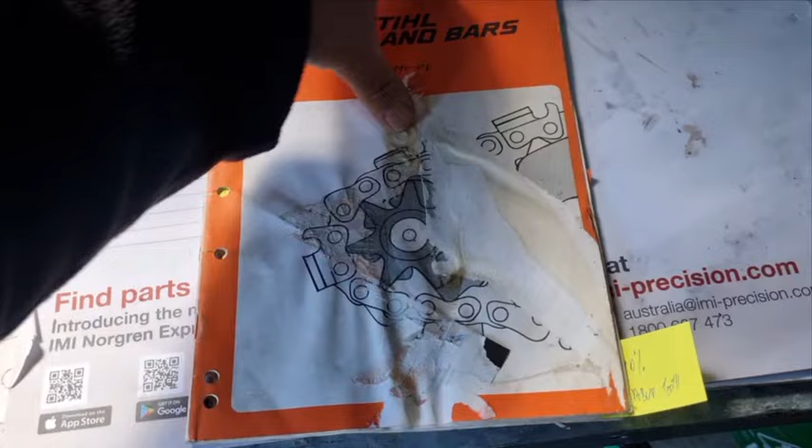The only thing I can see is the actual tooth geometry looks slightly different in the pictures. It doesn't go into huge detail, so we'll just go over a few points I've got marked. But if you look at the shape of the tooth, it looks like the Cox chipper chain.

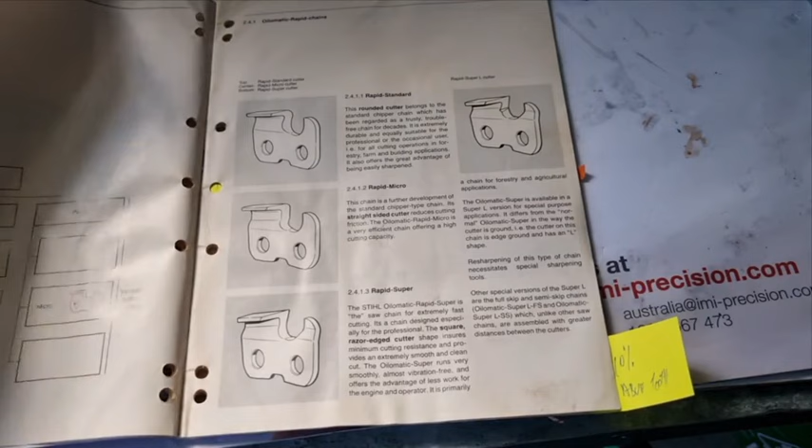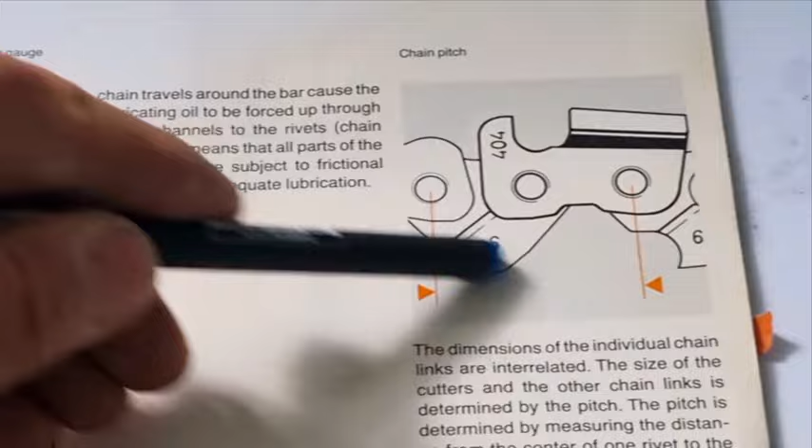Now I've got something marked on this page. Yeah, look, if you have a look at that, we'll see if we can zoom in there. It really does look like the Cox chipper chain. So the profile looks a little bit different than it used to on the tooth. This is going back 34 years ago.

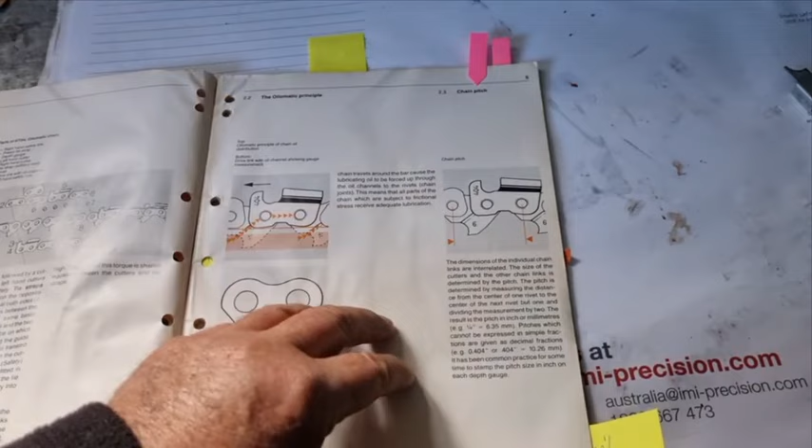And we'll just go up to the next one I got marked. This one here, so what do we got here? I've got something marked here. Yeah, look, this is something that was interesting that I found out.

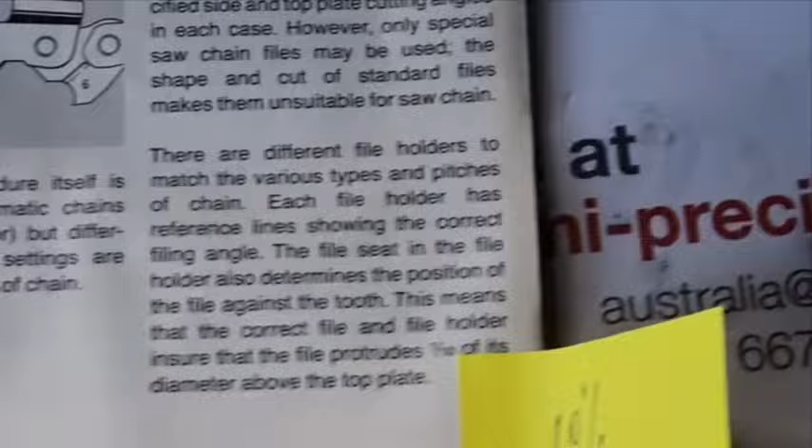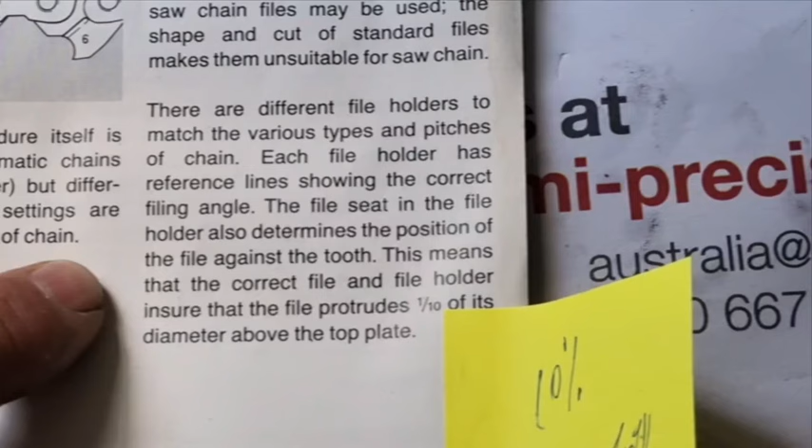So this is from Stihl, and they're saying, I'll see whether you can read this, there are different file holders to match the various types and pitches of chain. Each file holder has a reference line showing the correct filing angle. The file seat in the file holder also determines the position of the file against the tooth. This means that the correct file and holder ensure that the file protrudes one tenth of the diameter above the plate.

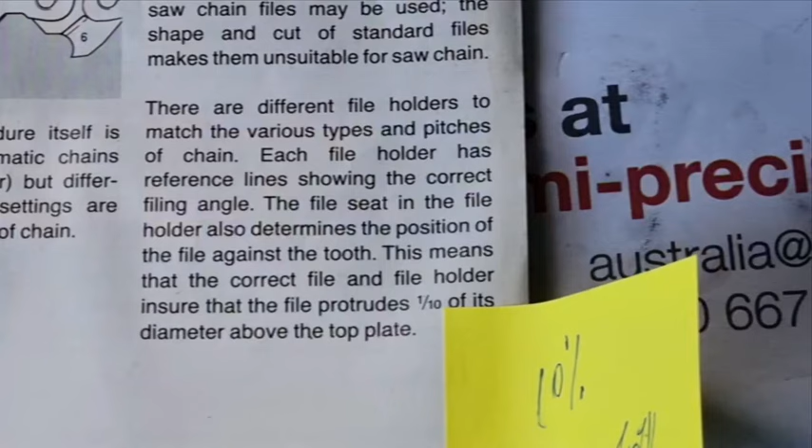So they're saying that when you use, and I've got one here, the old file holder, which is this type of thing here, that the file only protrudes 10% above. Like I always thought it was around 20%. Maybe it is now, but back then it was definitely 10%. And that's written here in the Stihl booklet. So that's something that was interesting.

Now another thing that caught my attention, there's a few things, is when we go here, we'll see if we can zoom in there too. We'll just sort of get this in the right spot here. I want to draw your attention to the different file diameters.

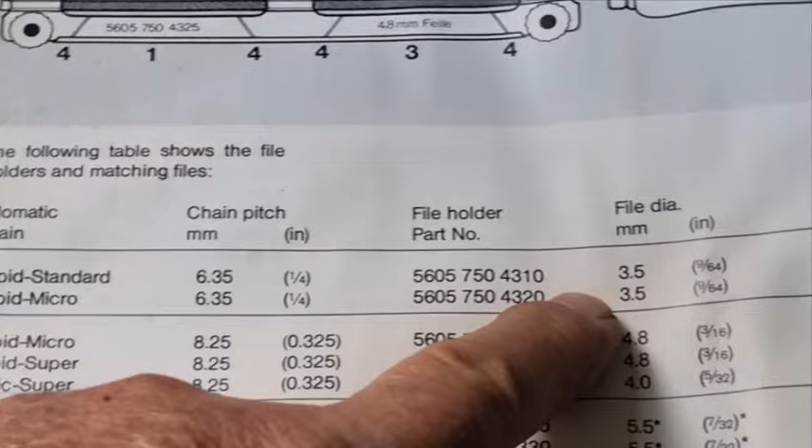We start off at 3.5. And even if we went up to a 1/2 inch chain, they list a 1/2 inch using 6.3. But you'll notice you've got a 3.5 millimeter file for a 6.35 chain or 1/4 inch. 0.325 is 4.8 millimeter file, and also they list a 4 millimeter file there as well for 0.325.

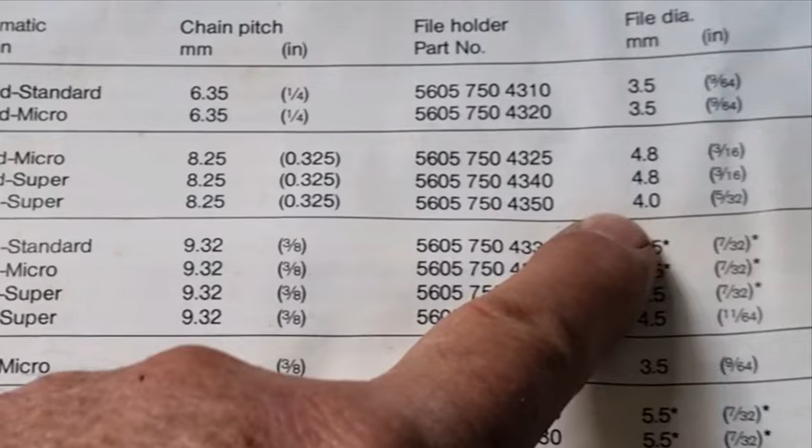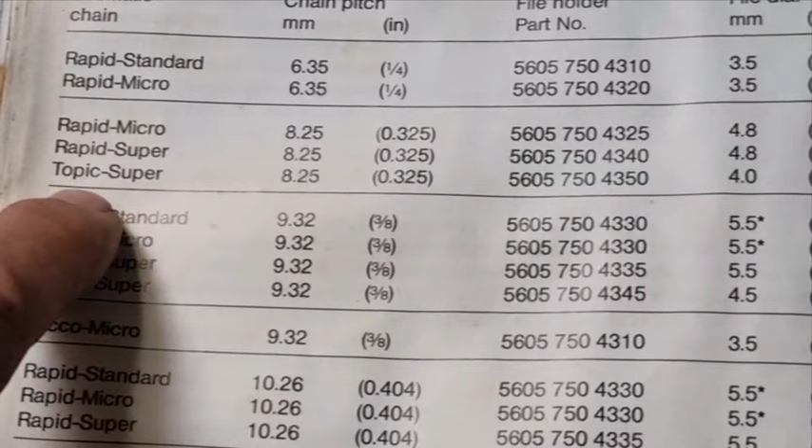So I'm not too sure. Oh, there you go, there it is. So here's another one, let's see whether you can see this, called Topic Super. I've heard of Rapid Micro, Rapid Super, but not Topic Super. Whatever Topic Super is, 4 millimeter file.

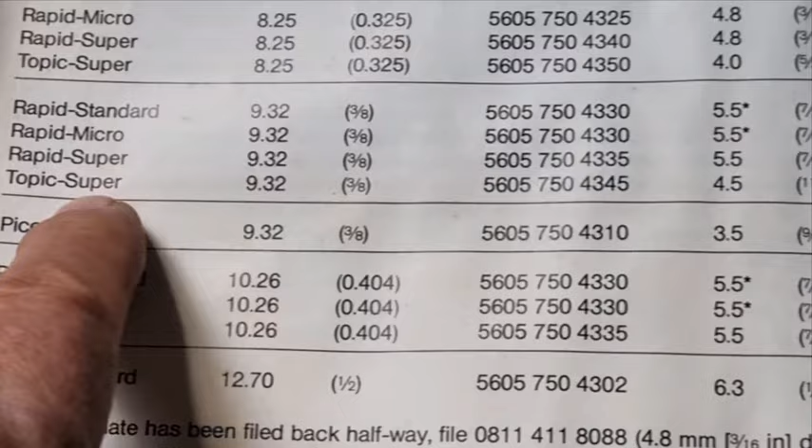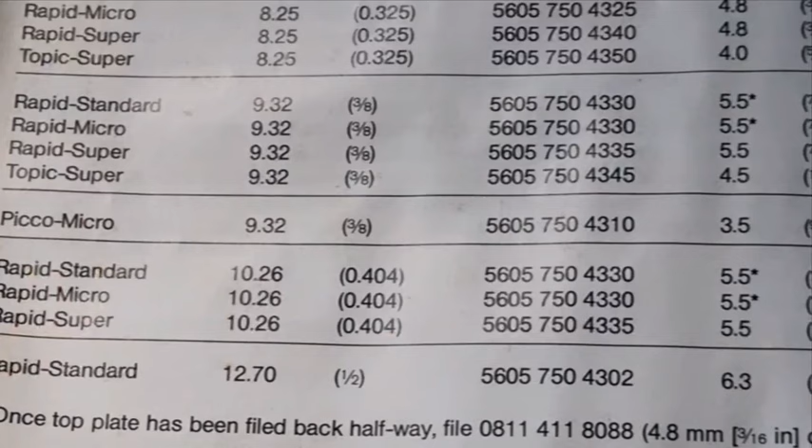And then if we go to Rapid Standard, which is what we use, Rapid Micro, Rapid Super, Topic Super -- as I said, Topic Super, I'm thinking this must be low profile or something -- but you see how you've got 5.5 millimeter files? There's no reference to a 5.2 millimeter file, which is what they use these days. I'm sort of thinking the teeth were slightly different profile back in those days. Yeah, no 5.2 millimeter file there, so that was interesting.

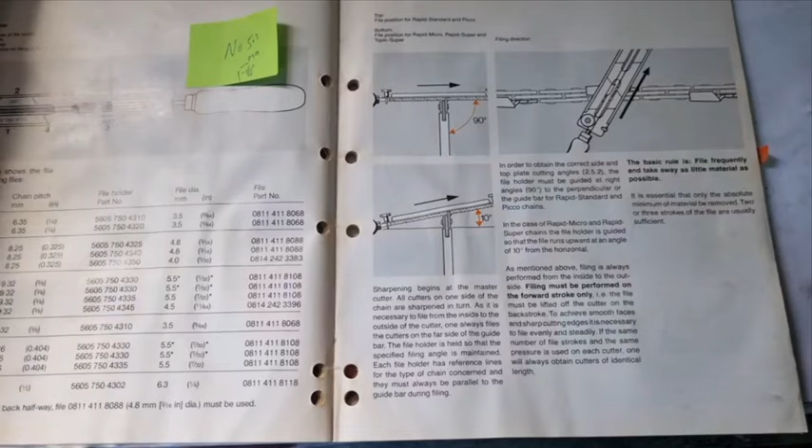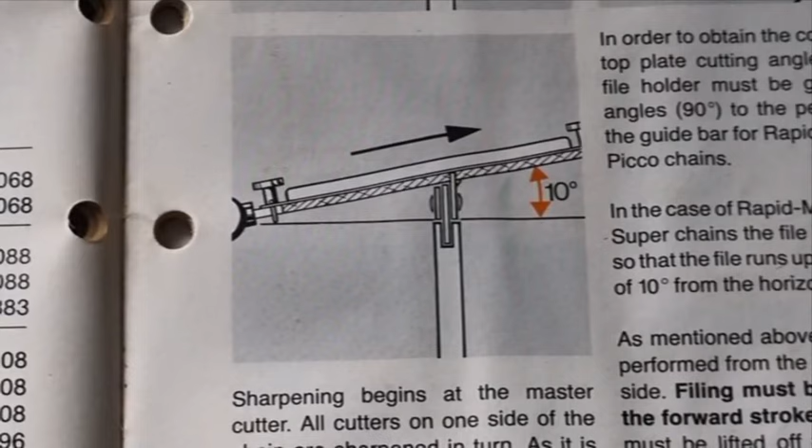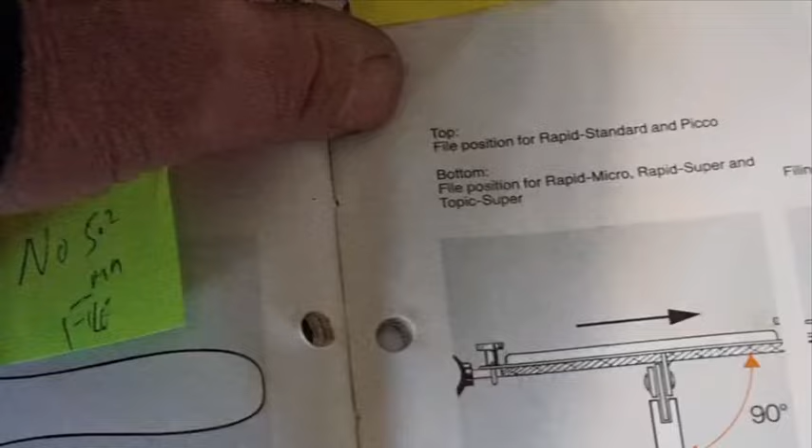Now another interesting thing, and we talk about the 10 degrees downward tilt. So this is a 10 degrees downward tilt here, and they're recommending to use the file holder, these file holders, 10 degrees downward tilt. So they're recommending that. Now these days they don't recommend tilting that. So what's interesting, the 10 degrees downward tilt is for Rapid Micro, Rapid Super, and Topic Super. The top position, where it doesn't have tilt, is for Rapid Standard and Picco. So that's their recommendation, just see whether you can zoom in.

See the top one, file position for Rapid Standard and Picco. The bottom position, Rapid Micro, Rapid Super, and Topic Super, there's a 10 degrees downward tilt. So yeah, look, that's interesting, that.

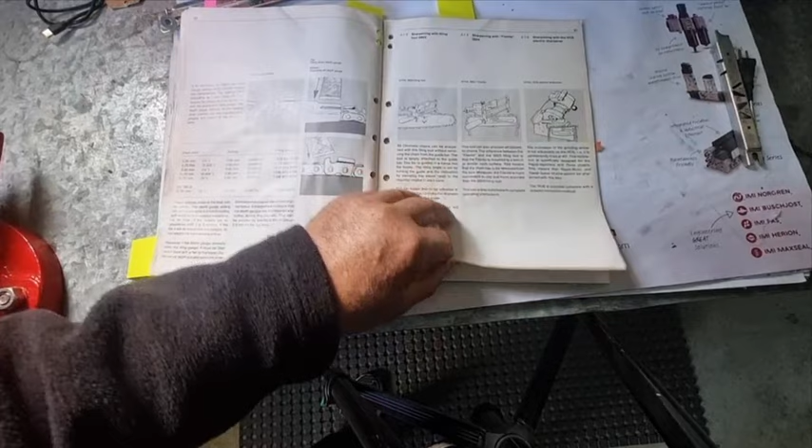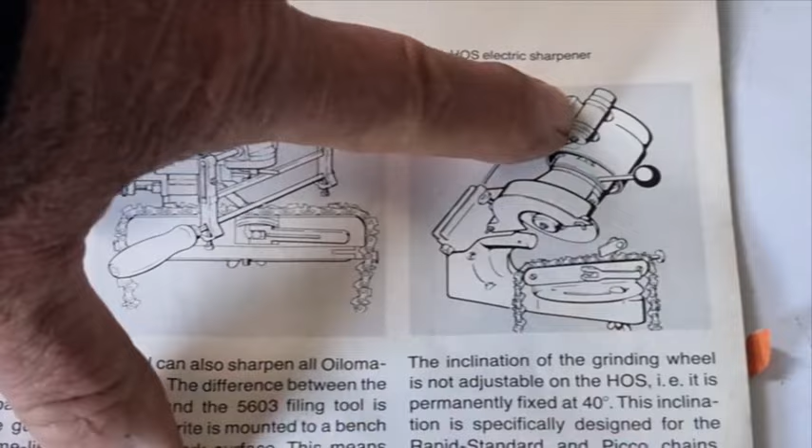It's interesting when you look at this. This is great reading because this was, you know, over 34 years ago. There's bits of information on the Stihl HOS grinder. Look, they look a lot different now than that. That's what they used to look like, just a picture of yesterday. There's yesterday's HOS grinder. The capacitor, look, the switch box is different. It's all different. Anyway, yeah.

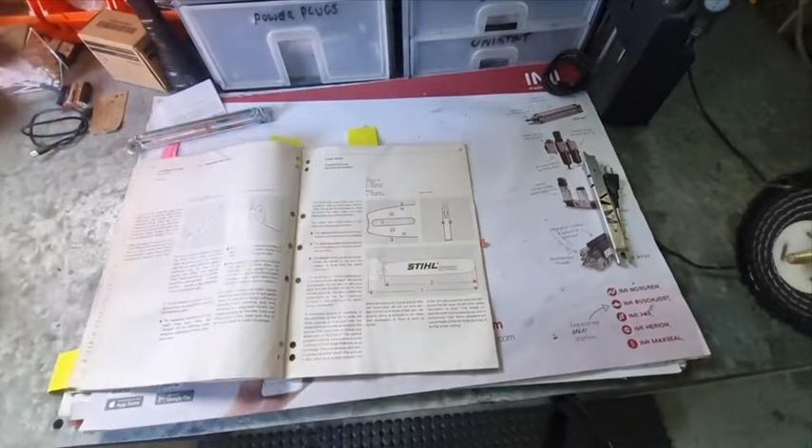So, yeah, I think there was only one other thing that caught my attention. Yeah, look, it's interesting when you look at the teeth here. This is why I was talking about the profile looking different. Especially when you look over here, it really does look like the old Cox chipper chain. This profile looks totally different than today's profile.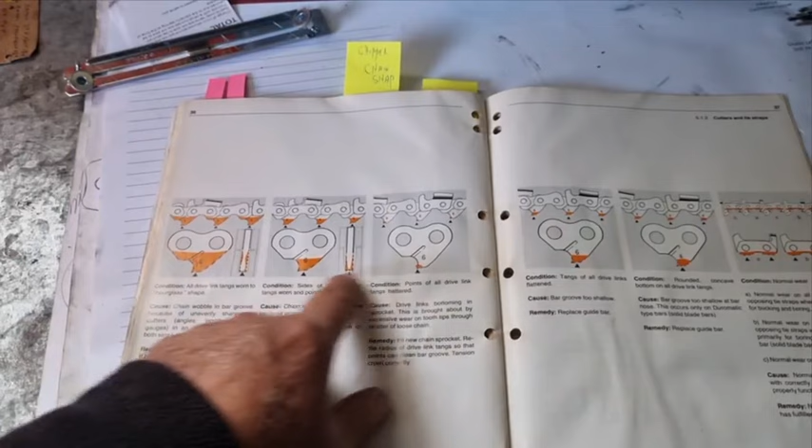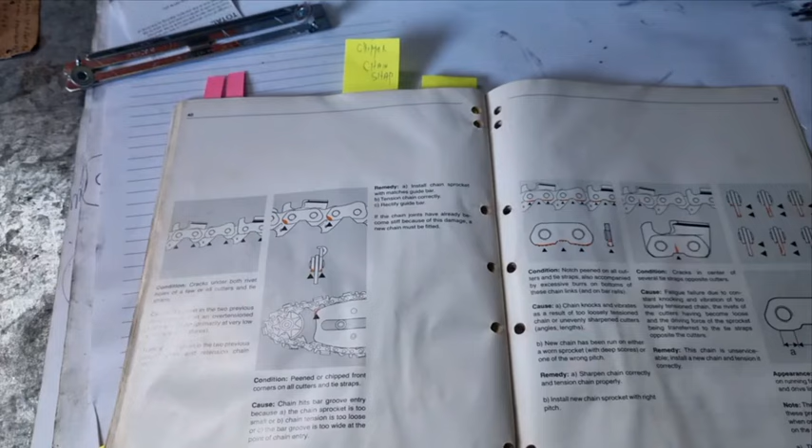It talks all about information about the tang and the condition and where the oil should go. So there's a lot of information about the tooth, not a lot about the geometry. But yeah, look, I just wanted to draw your attention to the 10 degrees downward tilt, how Stihl recommended it, and how they recommend it in this little book. But they don't go into any great detail about the 10 degrees downward tilt. As you could see, they recommended it, and these days they don't.

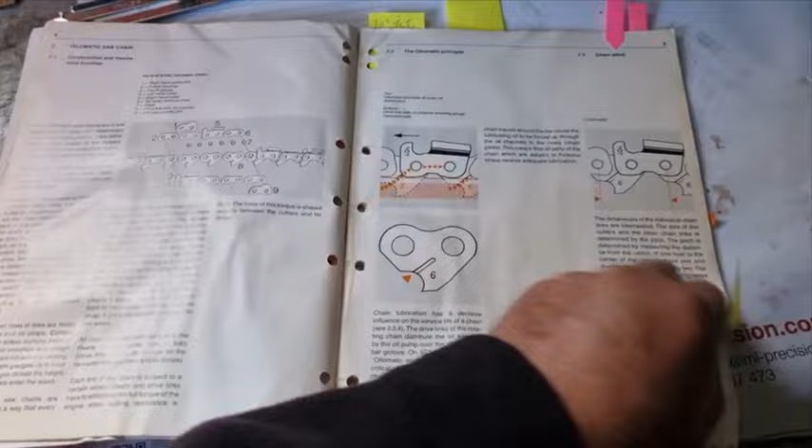There was one other -- yeah, there was another one I wanted to show you, and that was, I'll see if I can find it, the raker gauge.

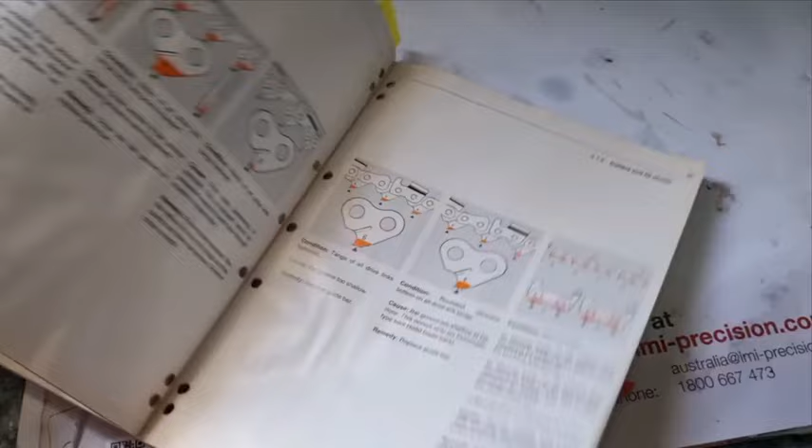I'll just sort of go through the book. The raker gauge back in the day almost looks identical, but the raker gauge of today...

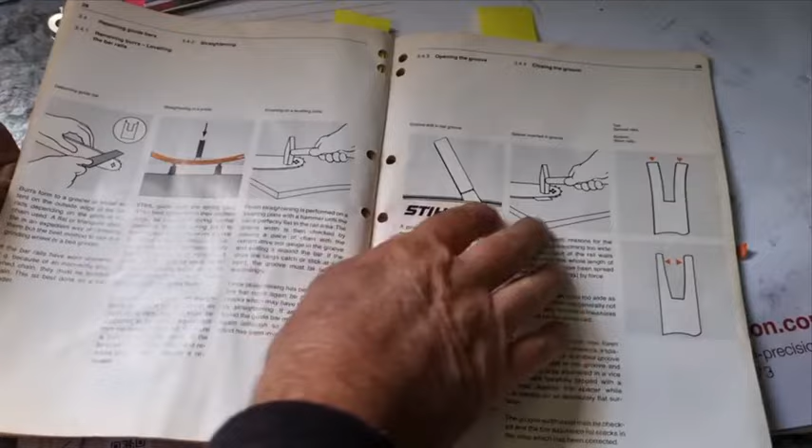Here's a little bit of information about straightening your bar with a hammer.

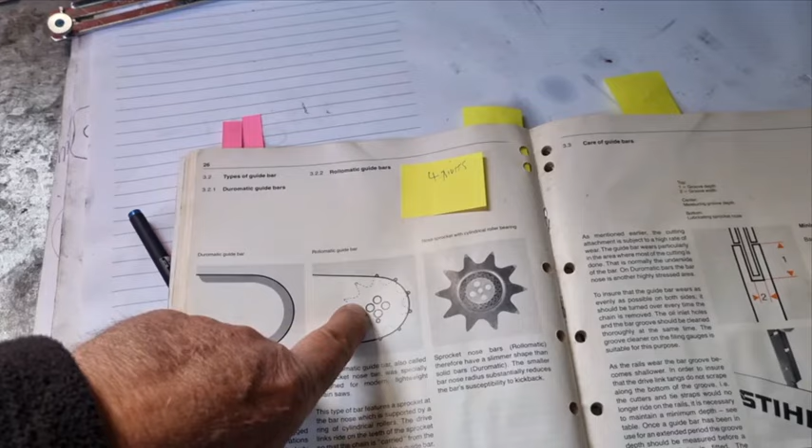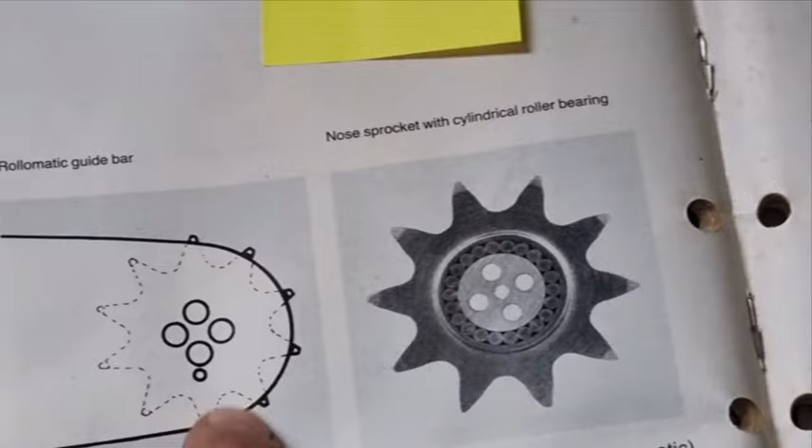There was another one I wanted to bring to your attention, and you'll see they've only got 4 rivets in the nose. If we zoom in there, you can see the 4 rivets there, and they look like they're little bearings in there. I don't know if they're ball bearings or roller bearings or what they are, but the rivets only do one thing. Yeah, it's just 4 rivets, whereas today they have more.

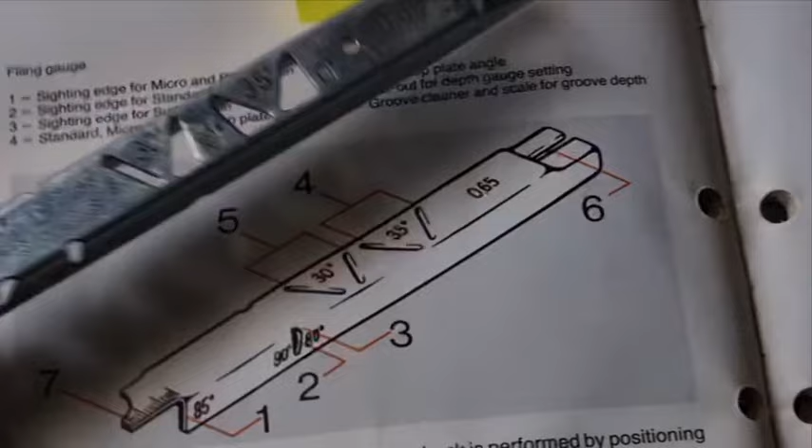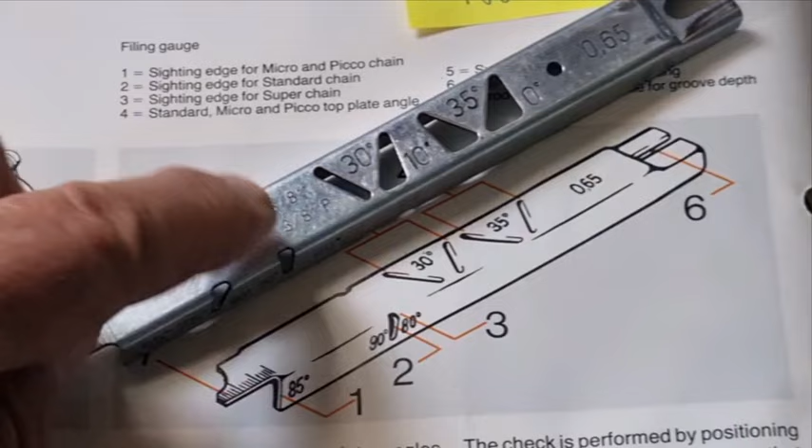I was just trying to find the raker gauge. There it is, the raker gauge. Have a look at that. So here it is. And the difference is the part at the back hasn't changed. The windows, there's more windows. There's only a little bit of difference there. Just a little bit. But on top, you got 30 degrees, 10 degrees, and 35. So there's no 10 degrees stamped on there.

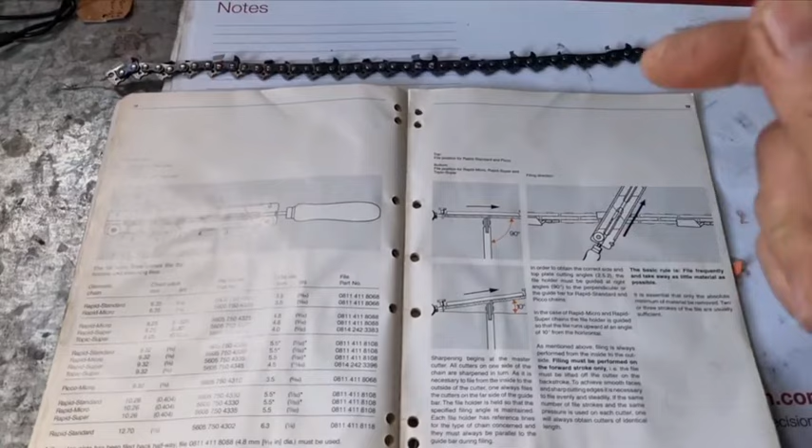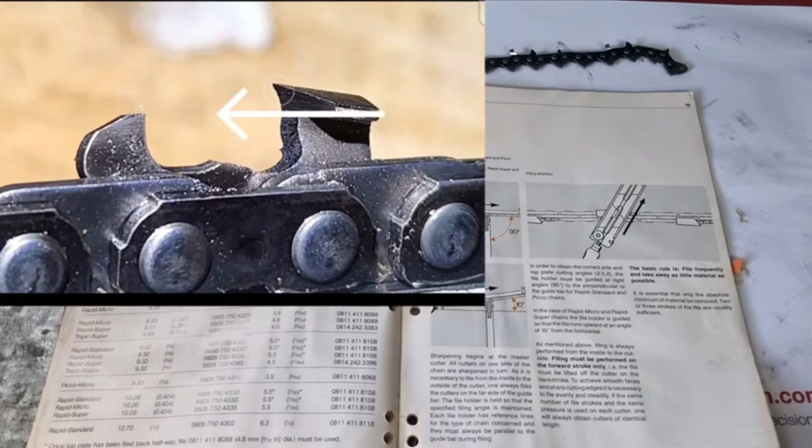Now, another thing I'd like to draw your attention to, if you look in the top left-hand corner, you'll notice it's a full chisel tooth. I'll put a few photographs up of this full chisel tooth that was sent to me by somebody. They didn't confirm how old the chain was, because I don't think they knew either. But they were talking about the 10 degrees downward tilt.

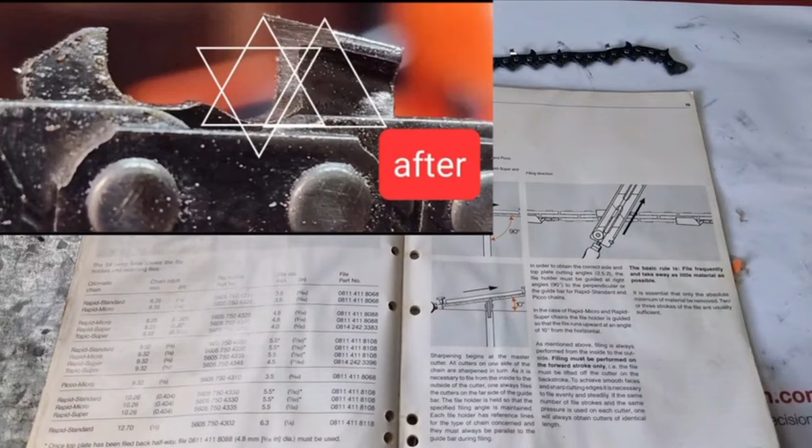And if you clearly look at this picture, you can see that the tooth is not sitting horizontal. Now I know that you can take a photo very similar in this position and it doesn't look like that tooth. This tooth definitely looks like it's down on an angle.

And if that's down on an angle, and this chain's over 30 years old, stands to reason why they had the 10 degrees downward tilt and they no longer use it these days.

Because I could tell you what, if you look at the modern tooth and I put a square on it, it's dead flat. The top plate is horizontal. It's 90 degrees to the chain bar. So it doesn't go on an angle. But these teeth definitely look like they're on an angle.

So if someone out there has an old chain that's over 30 years old from the 90s, they may be able to confirm that it is.

But what I will do is show you the picture. I'll take a picture of this tooth that we've got here, this one that I made, at the same angle of the tooth that looked like it was sloping down. So if I could take the same camera angle, we can look at that and compare the two photographs, and I think you'll find out that old tooth, maybe that's the way it was back in those days.

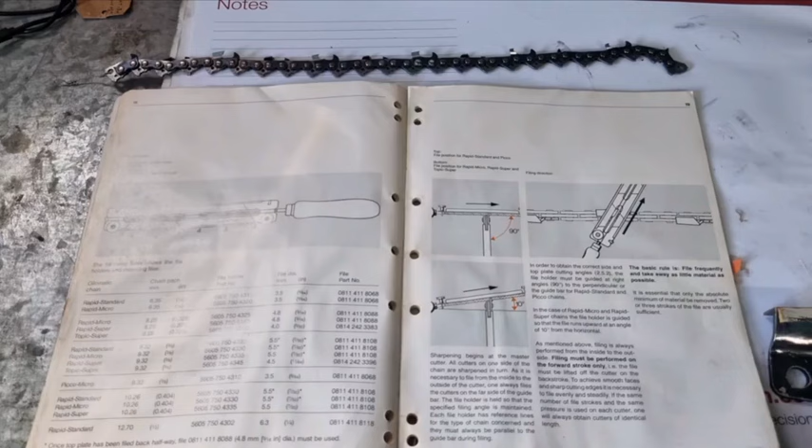Now, I know some of the Oregon chains out there, I don't have any of those that recommend 10 degrees downward tilt. Again, if somebody's got one, they could tell me whether they think they're 90 degrees or on a slight angle. That would make perfect sense to me.

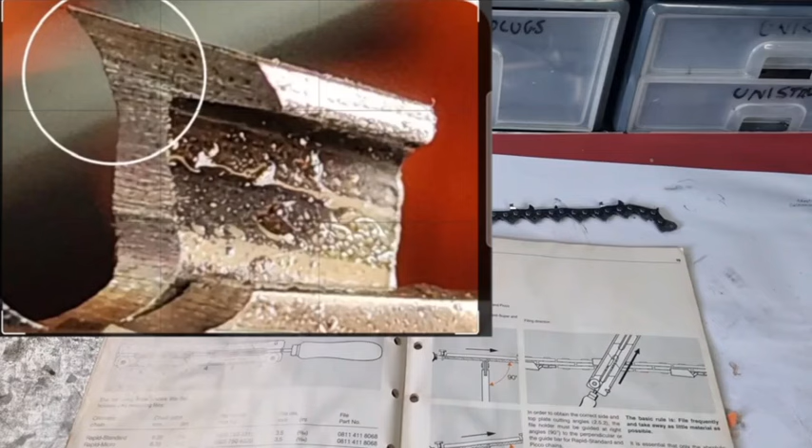Okay, so what we're going to do now: top left-hand corner, there's a picture of that tooth that looks like the top sloping down on an angle. So you can see that quite clearly.

I've taken a picture of the tooth that I made, the stainless steel one, and I made it so that the top plate is sitting 90 degrees to the bar. So we'll put that one up next.

If you have a look at it, especially underneath the tooth, the first picture of that old tooth definitely looks like it's on a slight angle. The camera angle makes it look like the tooth is probably sloping more than it should be, but I definitely think there is a slight slope on that tooth.

Anyway, it'd be interesting to see what people write in the comments as to whether you think that tooth slopes down or it's the angle of the camera.

Anyway, very interesting about the 10 degrees downward tilt, because there's a lot of people, whether they are going to use it or not. They've been using it for years. And if people have been hand filing and using 10 degrees downward tilt for many years and had great success with it, they're probably very reluctant to change.

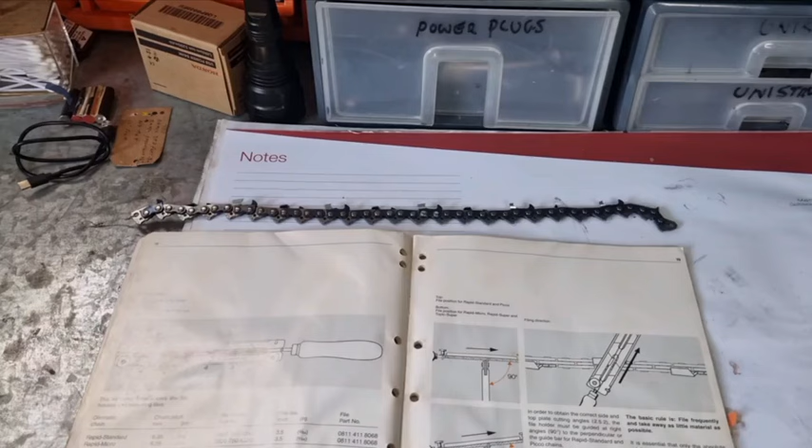But that said, I don't think putting a bit of tilt on your tooth is going to cause any harm whatsoever. Anyway, I'll be very interested to hear what people have to say about that.